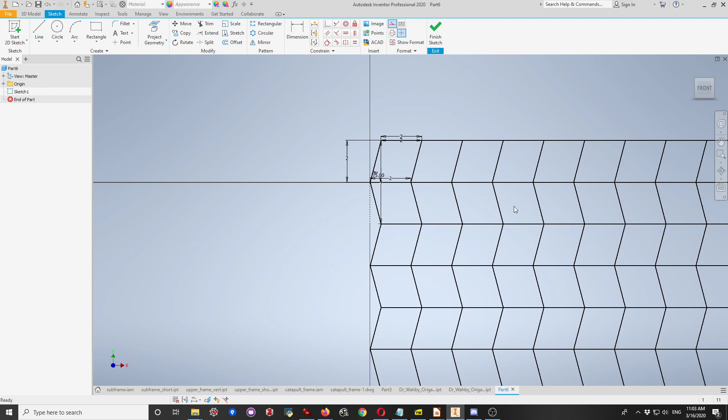Today we are going to look at how to tessellate a pattern, how to iterate a pattern, how to copy it many, many times in a rectangular array without having to draw all of this stuff. If we zoom in on this pattern, it looks pretty regular, just a bunch of parallelograms over and over again. If I had to do this by hand and sketch out each individual one, it would be a huge pain. I don't want to do that, so I'm going to show you how to do this all very quickly.

So naturally, we're going to start by creating a new part, and then we're going to change our units to centimeters and kilograms, as we always do. Centimeters and kilograms, hit OK.

Now we can go ahead and, well, first we're going to save our part. Save as, and I will call this Miura Ori, because that parallelogram pattern is the Miura-Ori fold pattern, which we will discuss more in class. So I'm going to go ahead and save that.

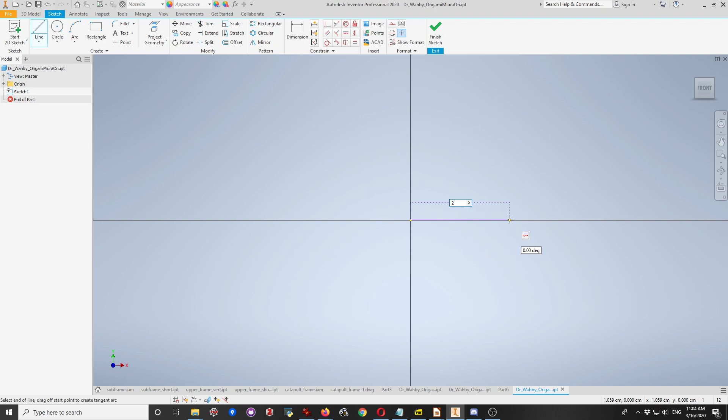Now I can begin my sketches. I'm going to start my sketch on the XY plane, and I'm going to start by making myself a parallelogram. The exact sizes of these I'm not too worried about, so I'm going to make my horizontal dimensions 2 centimeters. I can pick my angle to be just about anything, so I'll pick something for now and sort it out later.

The key thing is that I want my two sets of horizontal lines to be the same length and parallel to each other. And I want my two sets of upward facing lines to be the same length and parallel to each other.

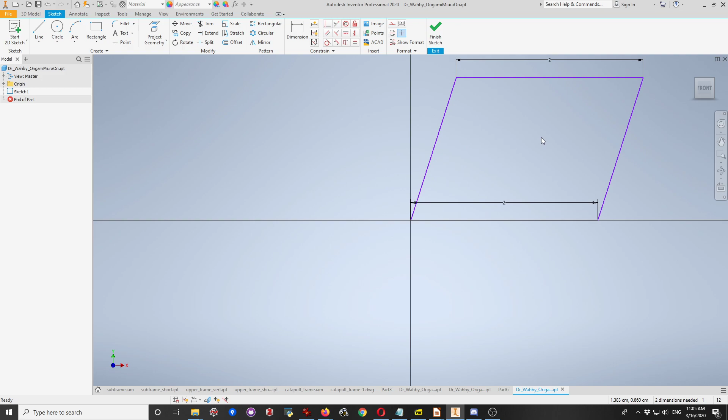Now I'm going to use my dimension tool to constrain things. I'm going to constrain the height of this piece, not the length of it. I don't want the length constrained right now, I want to constrain the height. So I'm going to click this and pull straight to the left, and make the height of it also 2 centimeters. So now I have this.

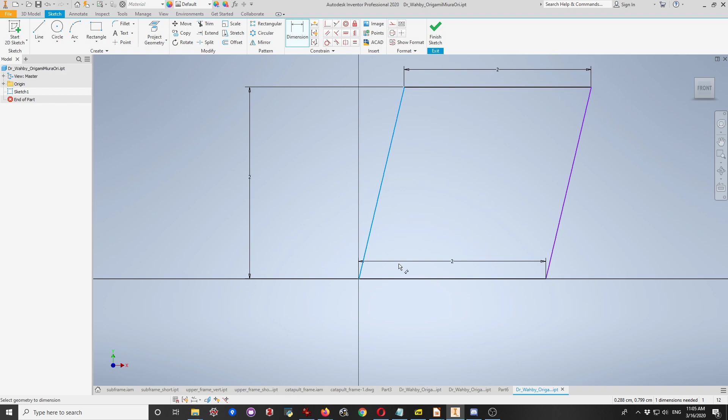Now I also want to constrain the angle, so I'm going to use my dimension tool again between this upward facing line and this bottom line. Let's make that 75 degrees for now. So now I have myself one parallelogram.

I want to copy it, because if we remember the part I had before, it's not all the same parallelograms - I've got them kind of flipped, and they flip back and forth and back and forth. So coming back to my part here, I'm going to mirror it about this horizontal line so that I get another parallelogram facing the other direction.

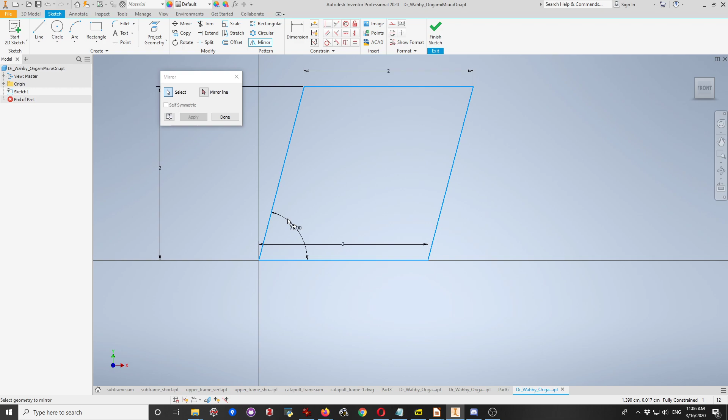To do that, I'm going to go to my mirror tool. I'm going to select all the geometry I want to mirror, so we'll start with these lines here, then select my mirror line. Note, I'm not even using a construction line for this - I can use regular geometry lines as well to mirror about. I pick that and hit apply, and boom, now I have my two parallelograms.

That's cool, but there's still more I need to do - now I still need to copy all of this stuff. To get this copying done, we use the rectangular pattern tool, and to do it, we need lines in the directions we want to copy. We already have horizontal lines because I want to copy horizontally, but I'm going to need a construction line going vertically. So I'm going to put that in, and you'll see in a moment why I need that.

It needs to start somewhere. The only important thing is that this line be going vertically. It can be anywhere—I'm just going to make it 2 centimeters, but it can be any particular length. The important thing about this line is its direction. Now I have one line I can use to point down and one line I can use to point to the right, and you'll see why that's important now.

So I'm going to come over to my pattern tool tab here, and I'm going to pick rectangular pattern. This brings up yet another really confusing dialog box. What's going on here is we have, again, our geometry selection tool, and tools to select which direction we want to copy. We can copy in one or two directions at once.

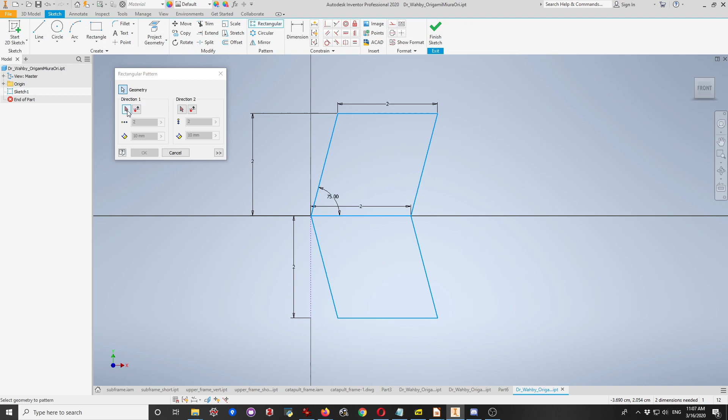So first I'm going to select all the geometry I care about—every single line that I want to copy. Once I have that done, I'm going to go to direction 1, and I'm going to select, with this tool, a line that is pointing in the direction I want to copy. So I have these two horizontal lines, pointing left and right. I'm going to pick this one, pointing off to the right.

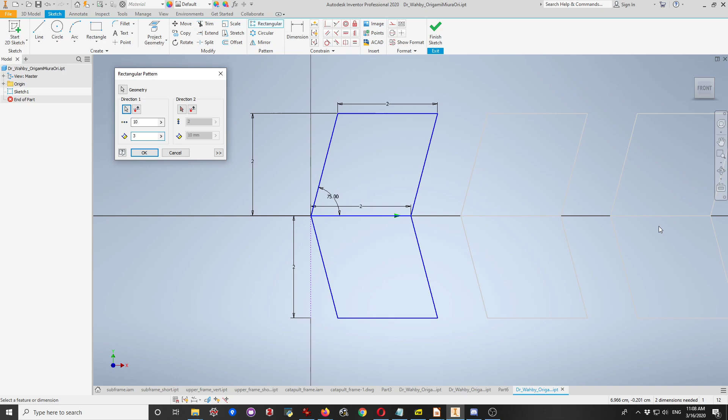Now I can choose how many of these I want to make. Let's make 10 copies of them, and it'll give me this little gray thing showing how big they are, but you can see they're kind of overlapping, and I can choose how far apart I want them. If I choose 2 centimeters, remember my horizontal lines are 2 centimeters, they'll line up nicely. I could also pick 3 centimeters and they'd be spread out a bit. So I'm going to pick 2 centimeters.

So that is our horizontal chunk, but I still need another vertical chunk. We're just going to do the same thing again, but with direction 2. Now I'm going to choose my direction selector tool, and choose that vertical construction line I put in, and you can see it's going to copy them pointing down. I can do the same thing—make 10 copies—but I'm actually only going to make 5, and I'll talk about why in a second.

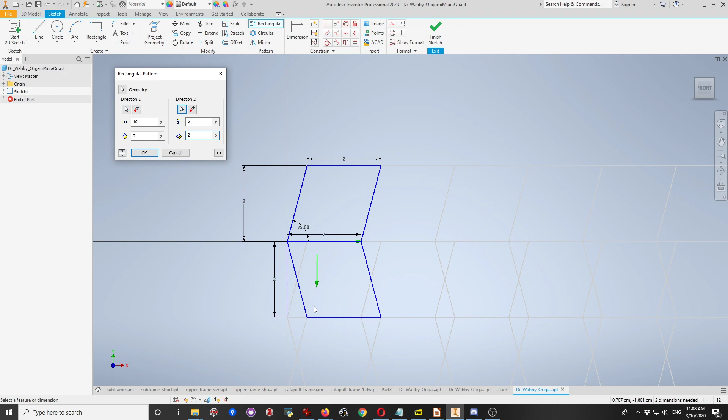You'll see that these are overlapping. If I use that same 2 centimeters I had before, they're still overlapping, and that's because this unit cell, this shape, is 4 centimeters tall but only 2 centimeters wide. So I need to make this offset by 4 centimeters. Now you can see that this whole pattern is going to end up giving me a nice square.

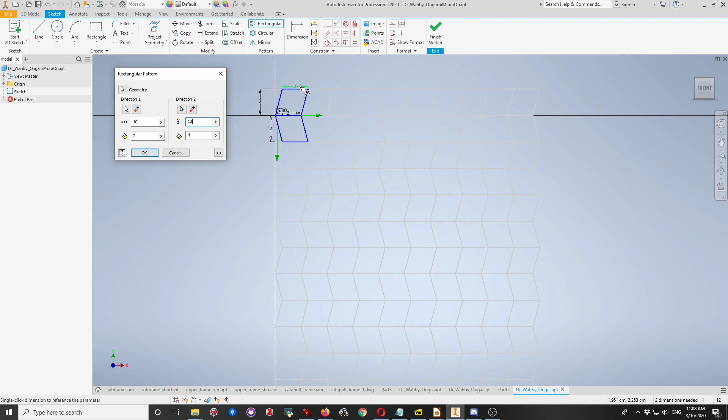I chose 5 here instead of 10 because my pattern is 2 kind of parallelograms tall, so if I choose 10 it's not going to end up being a square. So I'm choosing to make 5 vertical copies, each spaced 4 centimeters apart, and 10 horizontal copies, each spaced 2 centimeters apart. I hit OK, and then boom, I have myself a nice rectangular array of all these shapes.

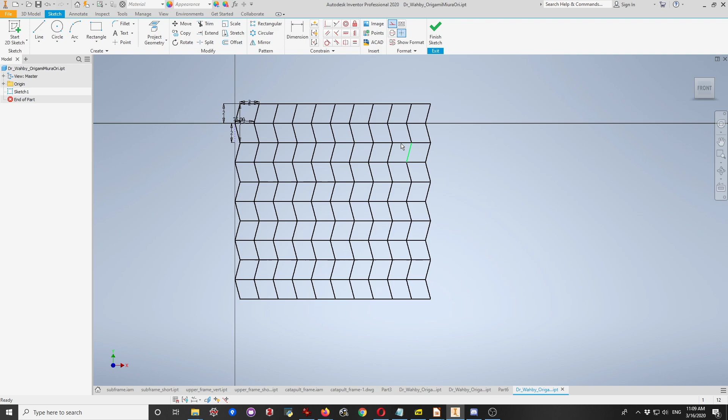So that saves me a lot of time if I want to make a single sketch with a lot of these regular repeating features, and I don't want to sketch them out all individually. So then you can just hit finish sketch, and then you're off to the races to begin extruding or doing whatever it is you would like to do with this shape. So that's a little bit on how to use the rectangular array tool.